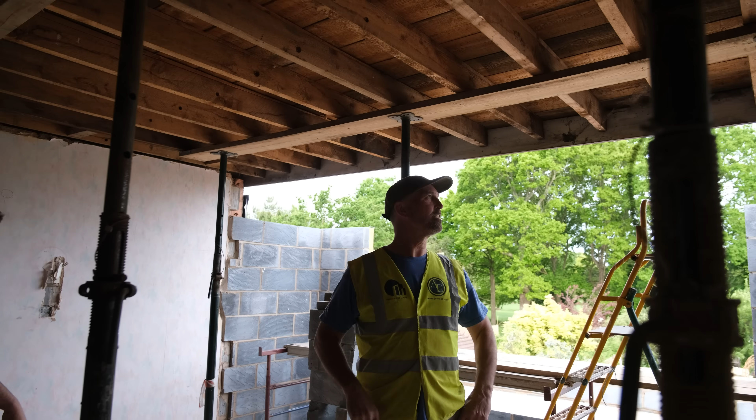So what we're going to do, Pete, is cut the existing blockwork at this level. The reason we're cutting it here is because the top of the wall plate is going to come flush with this, since that's the datum for the trusses to sit on. So the gauge from here to here means we've got to put a cut in here, a slip.

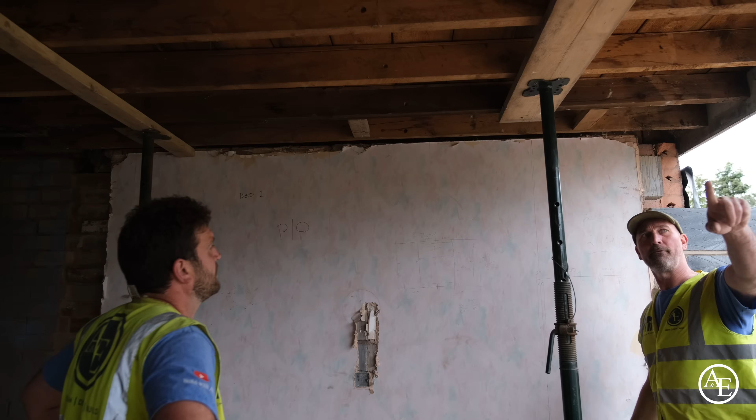I don't want that slip high underneath the wall plate, so we're going to put the slip in at this point, then put a full block in, then put the 4x3 wall plate across there, and the same on the existing side. That means the new wall plate will run from the outer leaf all the way through, and it'll be absolutely solid and constant.

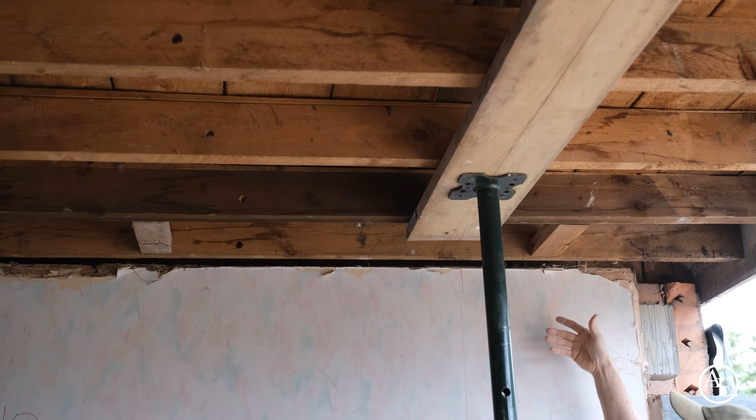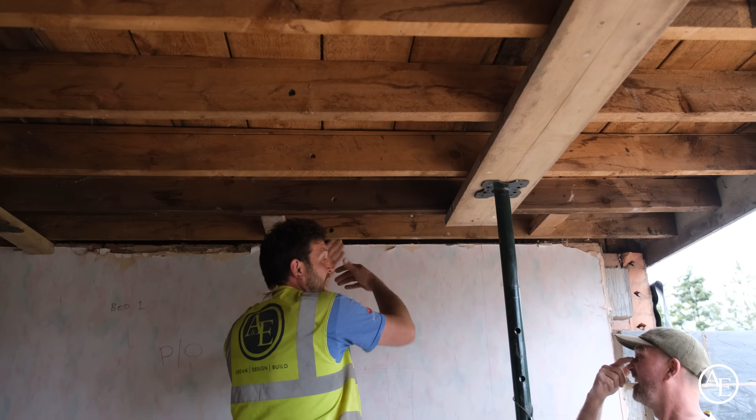The thing is, we're going to cut some of this and leave this joist in. We'll then cut that timber, fold back the felt or whatever we need to do to make it work, and then the lads can run that blockwork. So we're cutting from this side back and peeling the roof back from the top, just to keep it watertight for now until the trusses arrive. Once we get a date for the trusses, we'll have to end up stripping all this out.

So the decision is: do we strip it out now, or wait until the trusses arrive? We've got good weather at the moment, but we don't know what it'll be like going forward, it could rain. So it's a free covering at the moment, and the way I look at it, the best thing to do is wait until the day before the trusses.

It will take us a day to strip this between us, then it's ready to rock and roll. It'll take us half a day to prep all the ends there, get them ready for the girder truss to go in, job done.

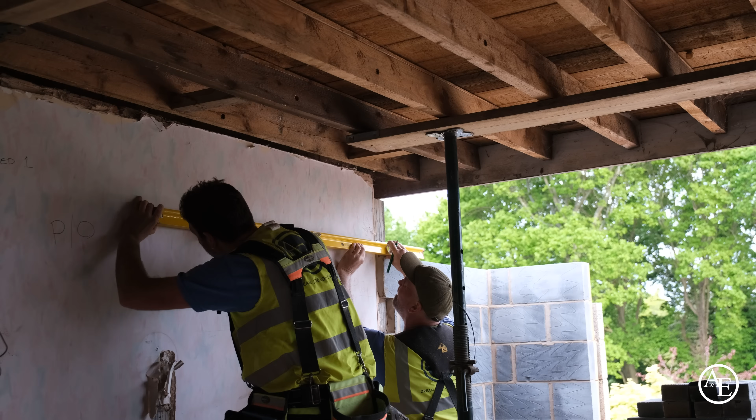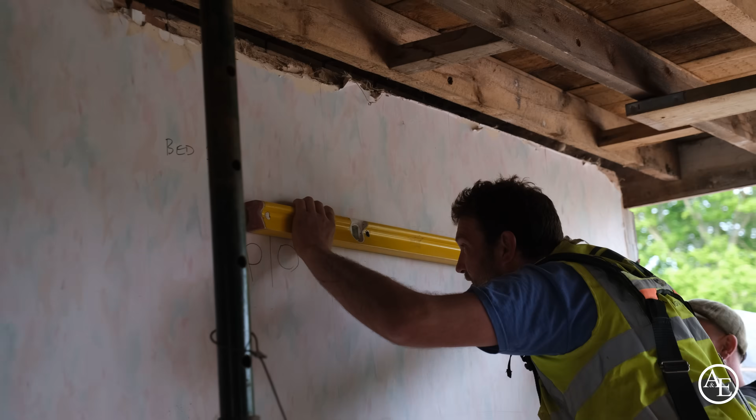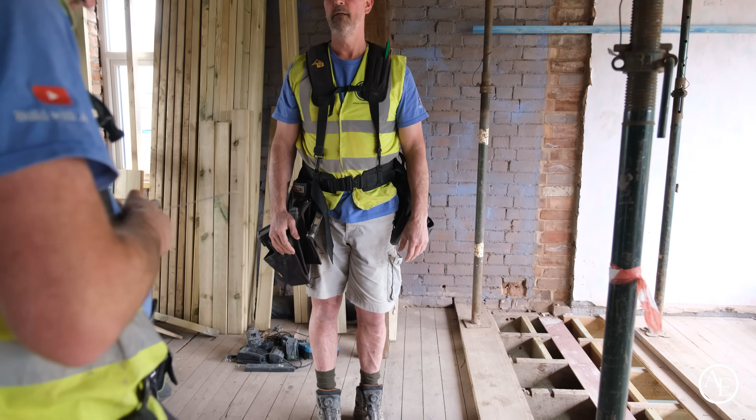That'd make this... Happy with that? Yeah, oh well, yeah. Sorry, can't get it started now. I love the way we've had this role reversal, you know what I mean? Usually it's me and... Didn't realise it did that, Pete. You've only had them 3 years, haven't you? I've had them 3 years, I didn't know it did that. No. Learn something every day, don't we?

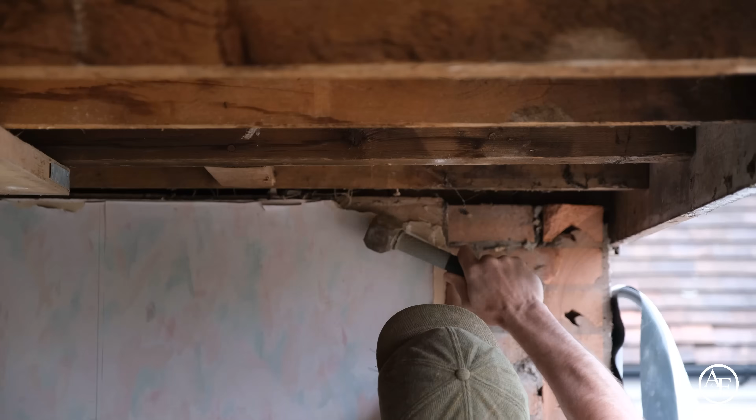That's lovely, that, Pete. You're right, Jim? Yeah, that's beautiful, mate.

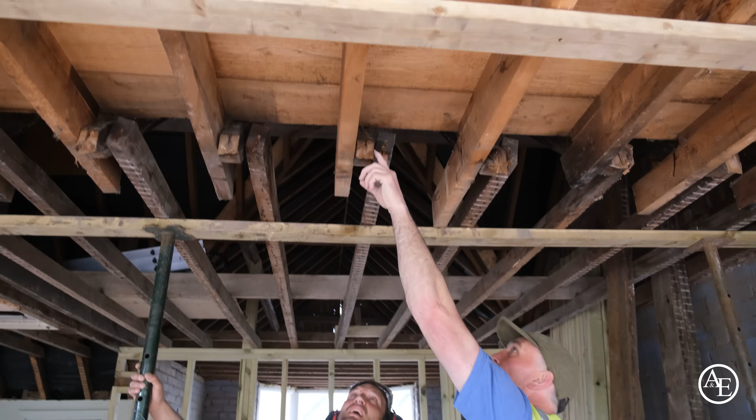The reason we put the back on, guys, it just helps that blade keep it stable instead of drifting. But then we need to use a hanger that's going to hold this, don't we mate? Yeah, because it's going to be 4 inches, isn't it? So the jiffy's got to be 4 inches wide, so we'll cut all that nice and neatly, all on the same line, seat cut and plumb cut to take the two of them.

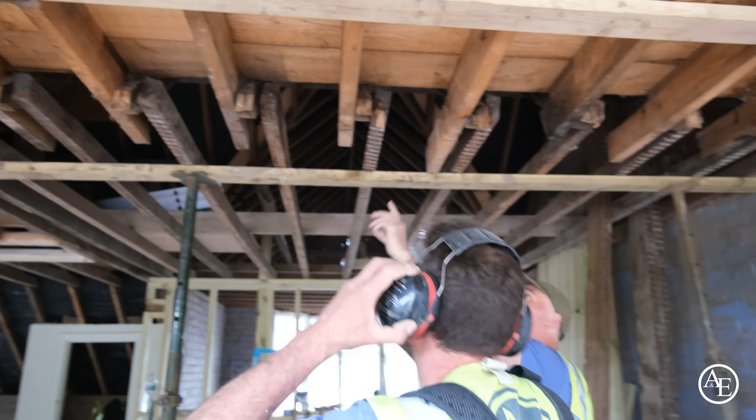We're going to make sure these are spot on here. If they're not, we'll trim them to suit. But then everything else will be aligned, and the trusses will just come up, and it'll be a girder truss that takes the weight of this roof and the weight of this ceiling joist here, mate. It'll be like 3 laminations of the trusses.

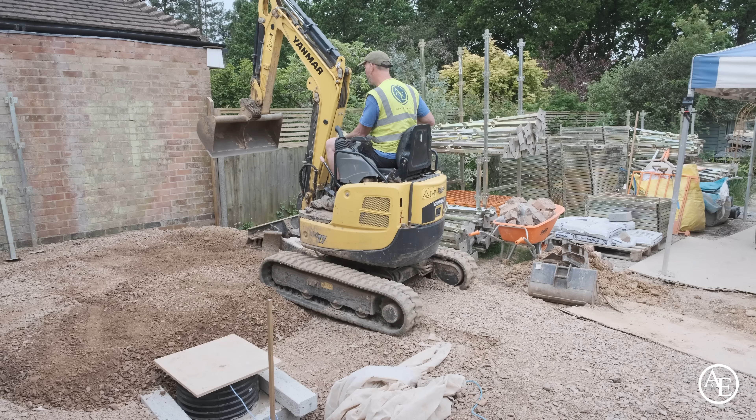Making it nice and safe. The G-decking's up quite high, and the one thing I want to do is give it a lot of support on this movement this way. So what we're going to do is level up the stone just here. It means I can bring some G-decking out, and that'll stop any wave coming this way, just make it a lot more stable. I can then return it onto the side, and then crack on and get on with my job.

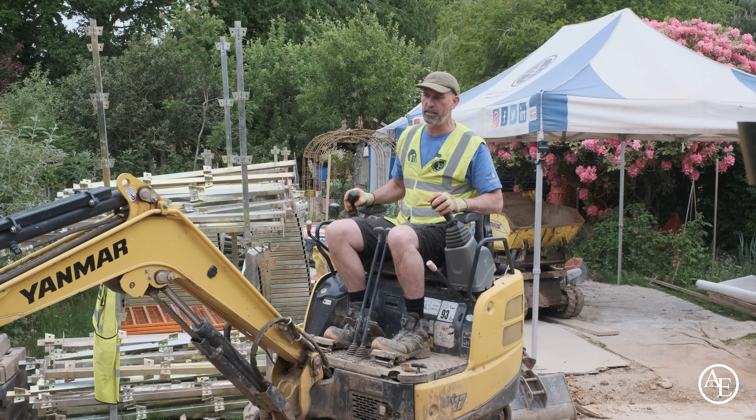Got a lot to do this week. Now the trusses have been ordered, they're going to take about a week and a half for making trusses. If you haven't watched that video of how to make trusses, see the link above, that will take you to how they make them. Absolutely brilliant, really amazed how much they do. How many trusses they produce in a week is phenomenal.

I love my G-decking, yeah I do. I really do like my G-decking. Even James likes the G-decking, except for this one bit of handrail. Yes, that's it buddy.

I'll be able to stand there to there. That's looking good.

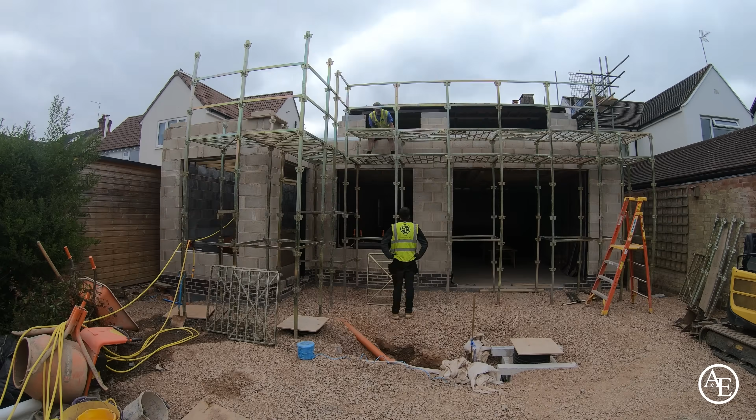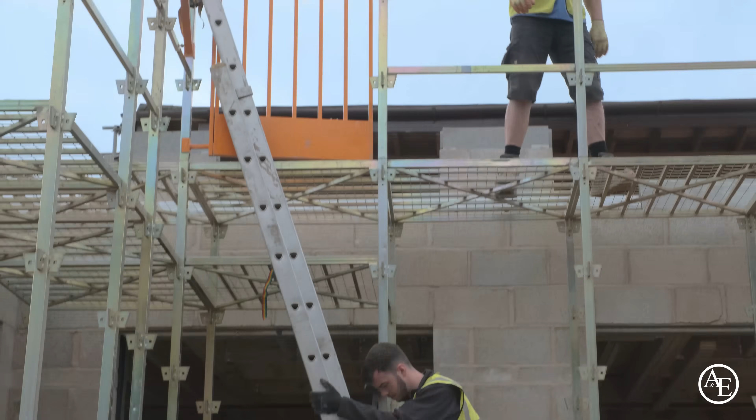Feel a lot safer. It's got some sway in it, but once I return it there, lock it off, get that one in, and then lock that off, I'll be a lot happier. The reason I've moved that out just one more rung is I like to be able to hold a ladder as I'm getting off it like that, instead of coming down here. That's a lot better than this now.

Can I have another upright here? Because what I'm going to try and do is just get this a bit more stable. This is what I don't understand - why didn't G-decking, so my G-decking, I love G-decking, but why didn't they just extend that down to go into a pole here, or extend it so it can latch into here, just to stop that wobbling. So what I'm going to do to stop that is try and latch something into here, strap it on, put another upright.

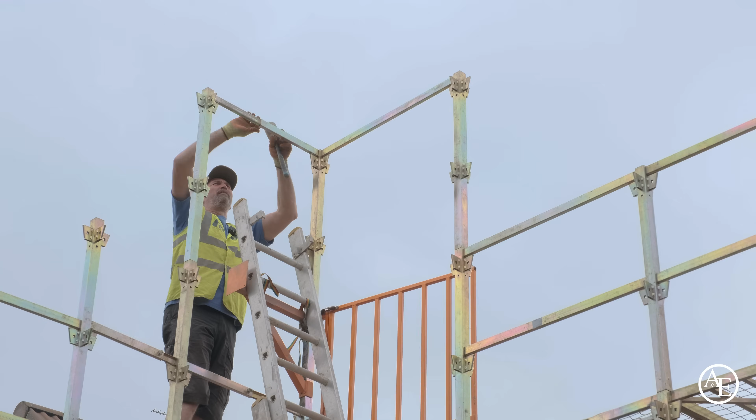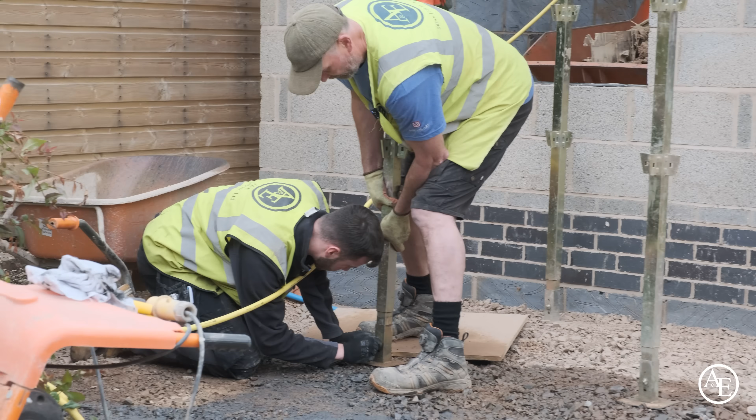What we're doing at the moment is just lifting the G-decking this side because I want it to level up. If anything, I want it to slightly kick into the build, just give it a little bit more stability. That's why we lifted that leg up, get it pushed up a bit more - it'll force it into the building, which is really what I'm after. That's it, get it. That's it. There you go, lovely. Just helps protect the pipe, doesn't it?

There you go, lovely, mate. Thank you, buddy. And then can I have a 750, please, mate? 750.

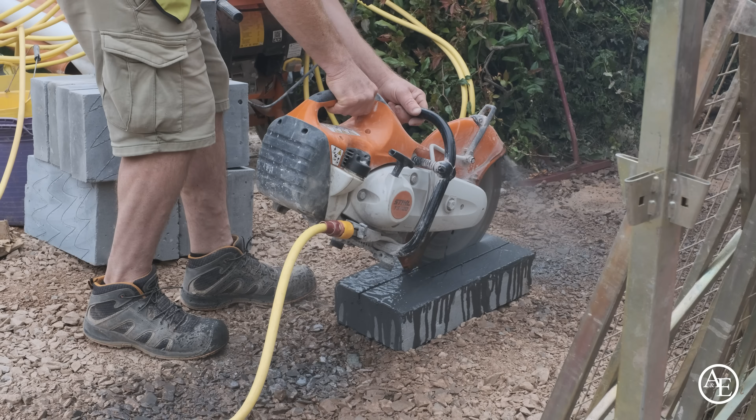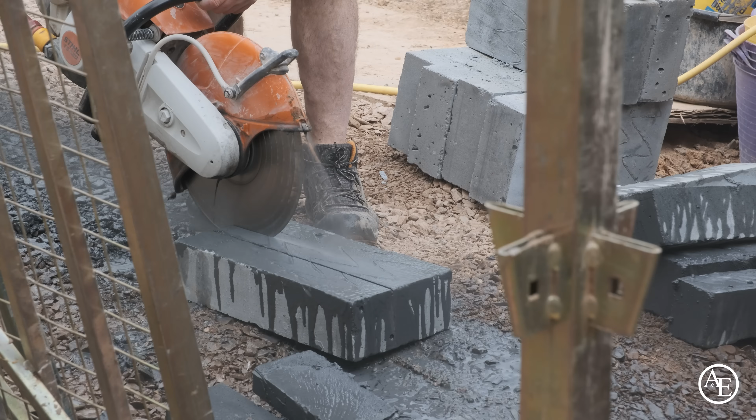Wet cutting with these blocks, if you leave it on your legs, if you've got shorts on, it burns your legs.

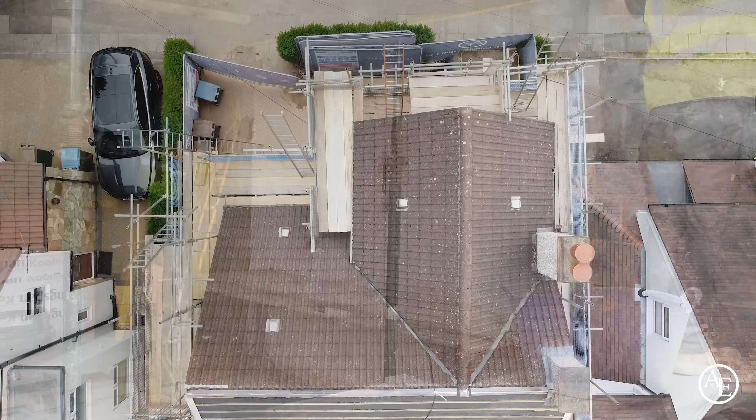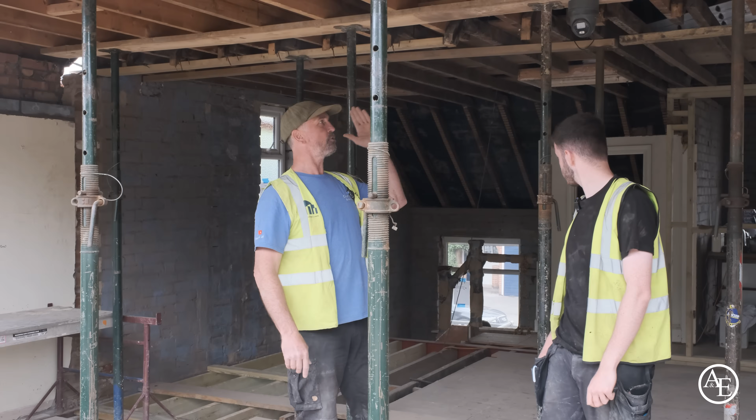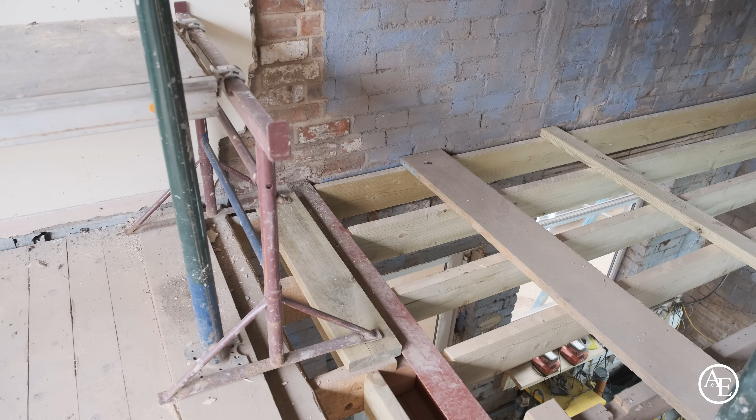So what I've got James doing is cutting the wall plate for there - that's going to be A wall plate, B wall plate, not too short. One thing we've noticed, because of the way the truss is going to line up here, we need to do a little bit of breaking out just down here. These joists aren't fixed at the moment, they've got a lot of movement. So what we'll do is put a couple of screws through this plank here, then put some timbers down here, just so we've got something to walk on.

Hold on, is this a Milwaukee tape? Oh my God, look at this. So James, he's gone to the red side. Pete's on the yellow side, James is on the red side, I'm on the kind of greeny-grey sort of colour, Festool. So this is Milwaukee. Now I've got to say, they've massively changed their game in the last 2 years. They've put so much investment into coming into the UK, and some of their kit is really, really good, I've got to say.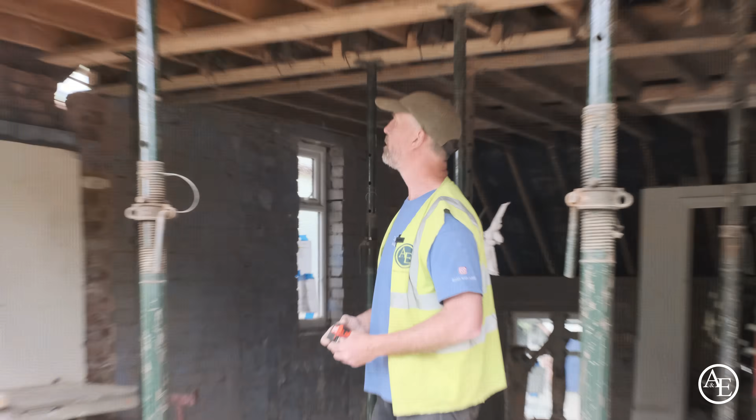Definitely. How do you find all your Milwaukee stuff, mate? Tools wise good, the tapes bend a little bit there. Do they? I find the ends bend, yeah. A bit too flexy? Yeah, feels a bit too flexy. But apart from that, all good. Apart from that, all good.

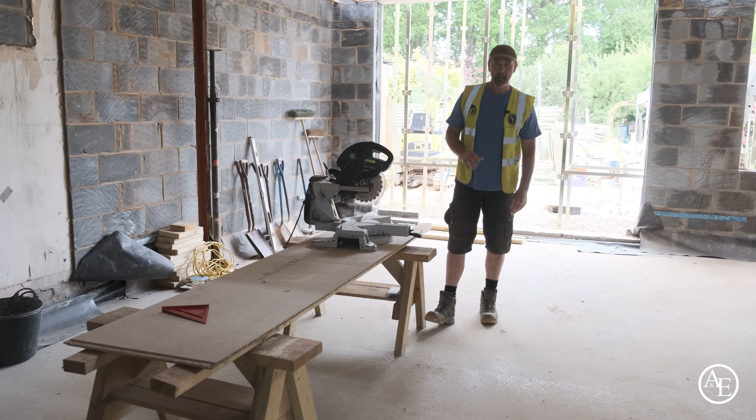As we explained earlier, James is in his last year of apprenticeship, and with the Festool, he's never used one, so I'm going to give him a bit of a quick run through on the Festool.

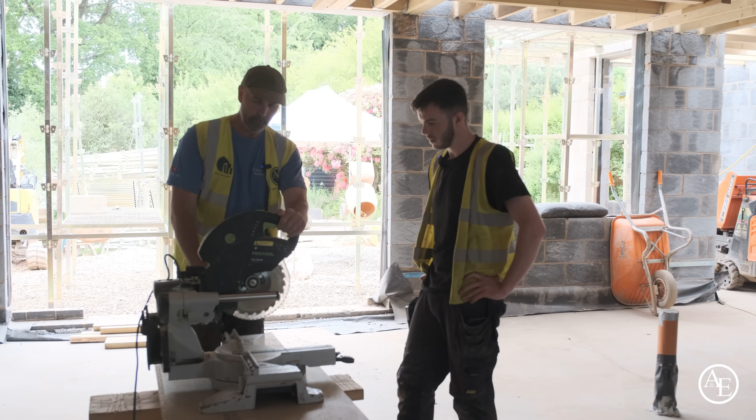Basically here, James, that's the lock off here, which stops the bed from sliding, so always undo that there. And then that allows them to move. And then the other one is, it's got a lock off here underneath - you see it there, that pin? So basically, when you put the Festool away every night, you'll always end up locking it right into that position, mate, and just locking it off. So when you unpack it, I then just take this out of there, and then undo that, and that's it, she's ready to go, mate.

And obviously, whenever you're cutting timber, always draw that way in like that, okay? Never draw that way. Always that way in, okay?

The other thing is that what we're now doing is putting wall plates on. So wall plates, in my day, 99% of the time was always 4x3. So this here, buddy, this is beautiful 4x3. Now, I picked out some really nice straight lengths.

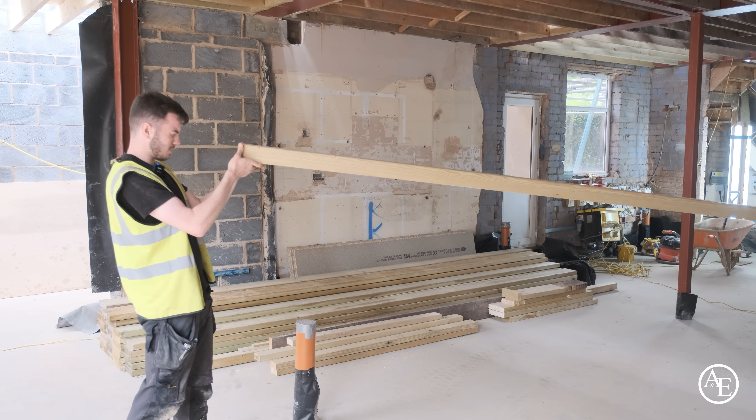So what I always do is I look down, James, and you can see it's got a little bit of a bow in it. So what I'll do, because the bow's that end, I'd end up cutting out the waste that end to try and get as much of the bow out as I could. So I'll let you cast your eye down there - you can see that bit of a bow. So what I'll do, because this is quite straight here, I'll then cut that to suit.

There's also a little dolly that goes here that you can adjust up and down, which is in the back shed there, which we'll get in a minute for ourselves. So if you throw that on.

The other thing is, what you'll find, James, is that truss companies now, they don't send out 4x3 unless you specify it. They'll always send out 4x2. Don't know why that is, they just do, probably because of all the clips they use. But I always, when I'm building, try and always use a 4x3 wall plate, because it's always better. Because then the brick, you can then bed that on, you can then put the straps on, get it anchored in. I suppose 4x2 really could do it, it's just that I've always been taught this way from day dot. But you'll notice a lot of truss companies, when they do send it out, it's going to be 4x2.

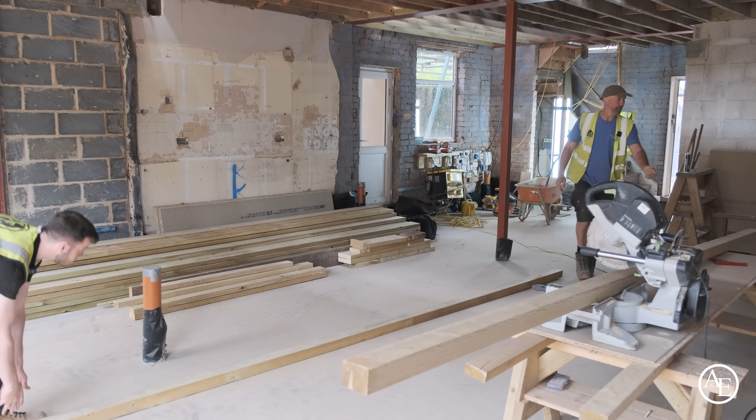There we go, there you go, same again there. If you have a look down that, James, you can see it's got a little bit of a camber to it, hasn't it? So what you'll do, you'll measure this end, because that's where the camber is up there. Chop that out, mate, okay? I think these are about 4.8s, something like that, but it will help if you get the dolly, the little adjustable, because then it'll level it all up for your bed instead of trying to hold it.

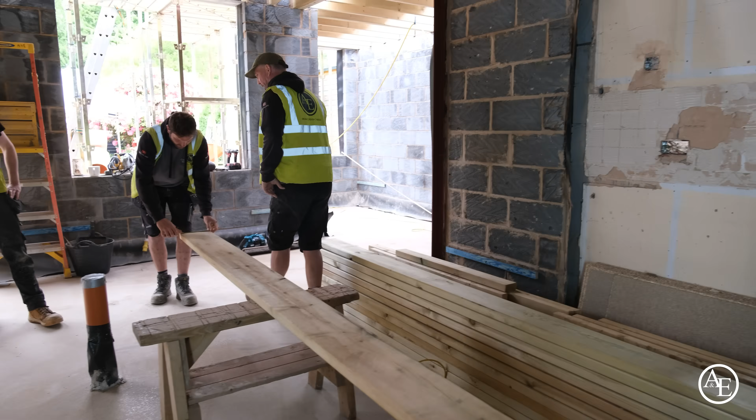So basically, 8.5 at the moment, so we can process 4 bits out of this, can't we? Well, to be fair, because you've got the fall and then the camber, they're all going to be different, aren't they? Yeah, but in essence we can get 4 pieces out. So because it's an 8, even though it's not a true, old school 9-inch, it's actually classed as 9-inch because it's classed as 215. It normally should be about 220, shouldn't it, mate? Yeah, but it's shy, isn't it? But that's old money though, isn't it? Yeah, so basically, we have found out we can process 4 bits of timber out of this 1 piece of timber in the firring strips that we want.

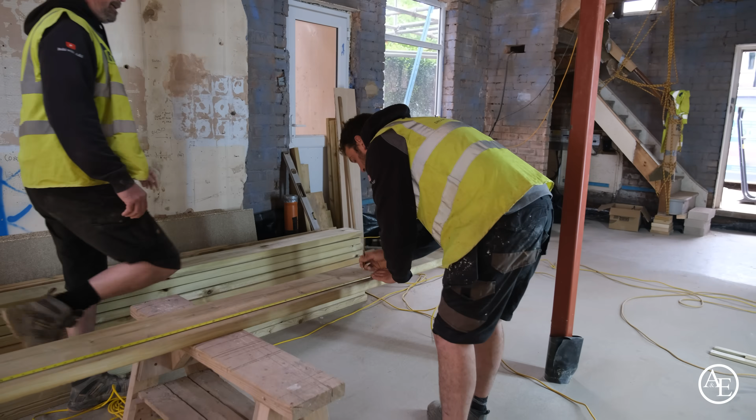So if we then go to the measure that we're having 1 in 40, so basically the length that you got first - the length determines everything, doesn't it? So what have you got all told, Pete, there? That's a nice new tape you got there, Pete. Yeah, you bought it. If you go 160, that's 4 1-in-40s, isn't it? So yeah, it is, yeah.

So James, come and have a look at this, mate. So 4 inches, look. And all we'll do is we'll ping the line, and wherever it ends up, we can sort of see where we are with it, can't we?

This is like watching an old man. There you go.

So James, what Pete's done is a really quick, clever way. We're looking to get a fall of 1 in 40. So 40, 80, 120, 160 - Pete's measured from this end, 160 inches. That means every 40 inches coming this way, we're stepping up an inch. 4 times 1 inch is 4 inches. That's why it's measured up from that point to the 160 inch mark, up 4 inches. That's the guideline where we've got the chalk line now.

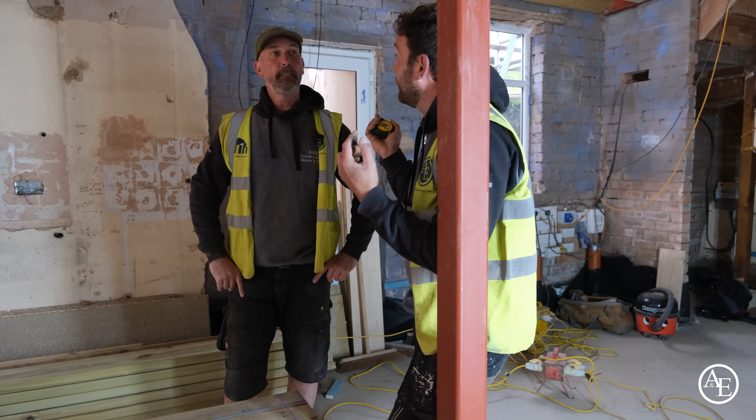If we cast it through to here, you can see it's past halfway. So don't forget you've got the thickness of the blade and everything else, so if anything we probably need to tweak it a little less. Should we try 1 in 45? And if that don't work, we'll try 1 in 50. Do you see what we're doing? Do you understand the process? Now what you're gonna do is we're gonna ask you to set this out.

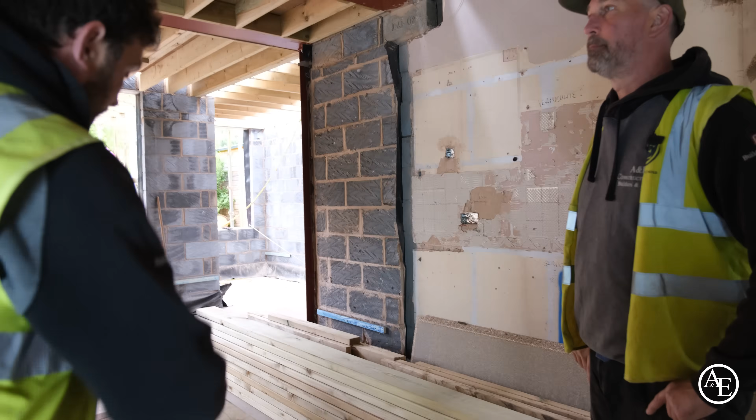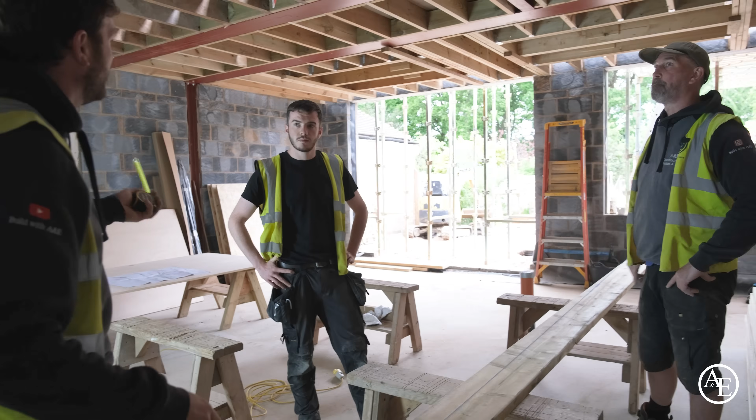So now we're gonna go to 1 in 45. If you multiply what Pete just did, it's 4 times 45 - 45, 90, 135, and 180. So you're going to measure 180 and come up 4 inches. We're going to cast a line and see if we get to the halfway point. This is just basic, we're not going to ping the line yet, because this is about working out the most efficient way to machine the timber - a combination between the best fall and being cost effective, because the price of timber's gone through the roof, so it's one thing you've got to consider.

So if you do that, then you've got your own tape, well done. So let's get the string line out of the way. If you just wrap it up, that's it. Now if you measure - basically 4 times 45, what's that buddy? 180. So move to 180 then.

Now you can see the difference in distance there, can't you, straight away, from the 1 in 40 to the 1 in 45. So basically, now you measure from that edge how many inches? 4. That's it mate, lovely. Beautiful, so now that's going to be our strike line as we put that string through there again. Okay, let's do that again, see what we get up with.

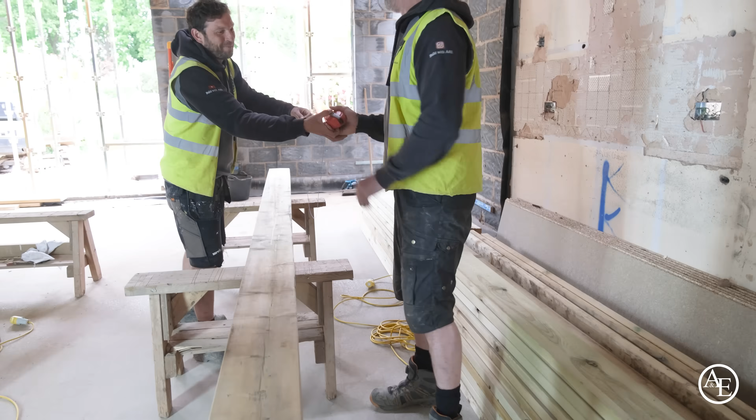Oh I'm liking that. Yeah, but you've got to do it. No, just put your thumb on it. Keep your thumb out there. No, pull it out. There you go. See, look, sophisticated. So now run on that line there, you see. What I'm going to do is bring it, grab that. That's it, pull it over.

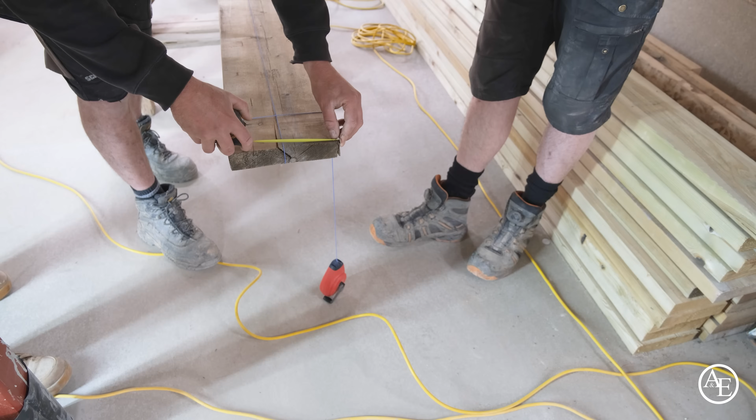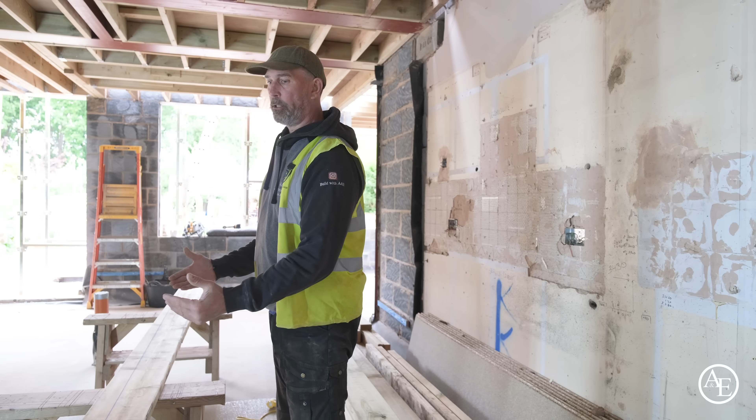There you go. Now you can see with the processing, we've got plenty to play with, haven't we? We've got 4 1/4. So by the time we process it, we'll actually get 4 out of this, won't we? Because you're going to go from nothing, then straight line all the way down - that's 2, isn't it? So basically we'll get 4 timbers out of 1 timber. That's why it's always good to check what you're doing. I'm happy with the 1 in 45 fall. The water's going to fly down there anyway, but it means we're not wasting a timber. As Pete says, timber's expensive now.

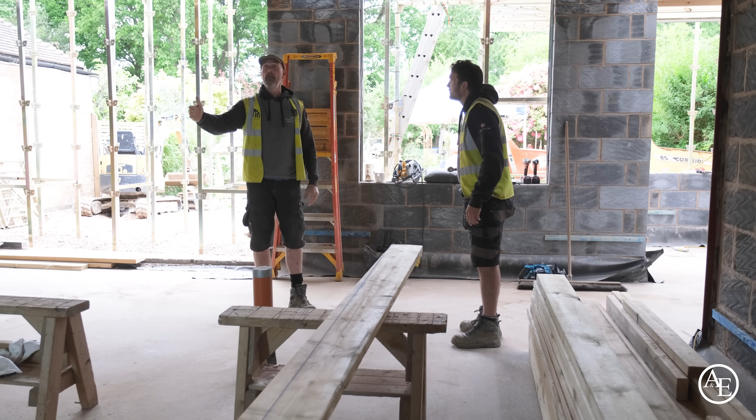So what we'll do now is start processing that in the full length like that. You'll do your marker like you've done, ping it, job done. So we'll have one fence set so it just comes to this measurement here. So one person will cut this line here now. The next person will cut the nice straight line with the big saw all the way through, screw down the timber so it can't move as you're processing it. This person then will carry on cutting this angle. Once that person's processed that one, you'll kick it back to this guy here. He'll then ping that last one.

That'll be it, okay? Alright, everything starts with this roof, mate.

The reason it all starts with this roof is because the water coming off this roof is falling onto this roof here. Because they're going to be some pretty good bits of timber.

What we've got to do is where we've gone to nothing here, Pete, because we're trying to create a camber of the wall, this roof falling this way. As we put that first furring strip in, we're going to have to cut in a certain amount of timber off the end. So we're going to go up to that point one inch, and then the first one is going to be the nothing point there.

Yeah, exactly that, mate. And then whatever the infill is, we can just machine that freehand. Okay, and also we're going to create a camber going down this way, and then to that corner there.

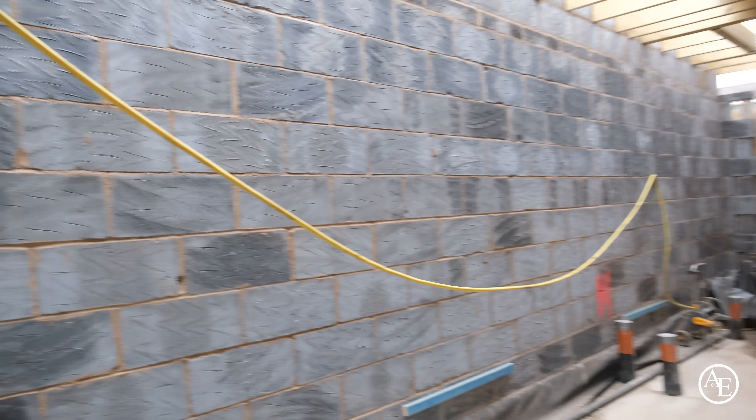As long as whatever the furrings are here, if we just do exactly the same coming that way, we know the water's just going to track along the edge. Obviously it's going to get shorter as we go to the connection point, but that don't matter because we can just machine them up freehand. It just means the water's going to fall to that corner there. That'll work nicely because it's quite nice when you can do that point and a bit of timber in it.

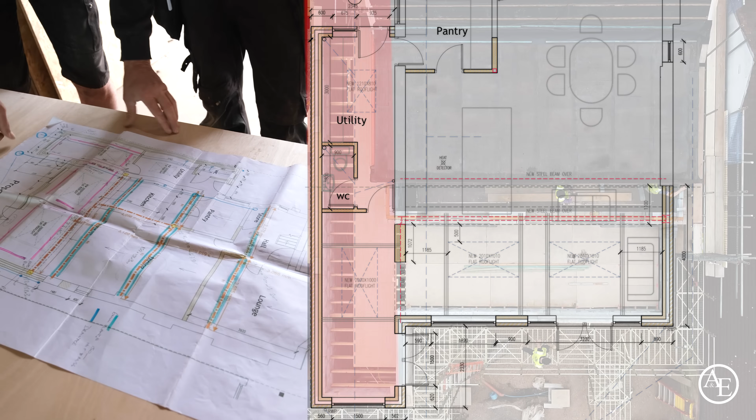So the first thing, James, is because we've got a flat roof coming in here and a flat roof on this section, the first thing you've got to do is determine where your outlets are going to go. So we've got an outlet coming in here, an outlet here, and an outlet here. I've got to make sure the water then trails that way.

It distributes, that's it. And then if you can imagine, because this fall from there to there is bleeding onto this roof, isn't it? Yeah, exactly that. So it's really key to understand the falls I need here, I need to get these furring strips in first here, don't I?

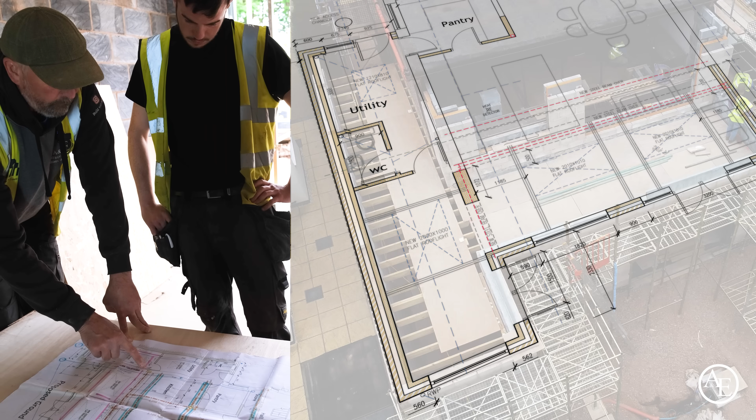Because once that furring strip's in there, that sets the precedence for every furring strip that we put in here, to allow us to get the fall for the water to come onto this flat roof. And it's the same with that, but also you've got to remember that we want the water to end up in here. We don't want all of these furring strips running through all the same. What will happen is the furring strips will be higher here and then get smaller in decreasing, but the actual flow of the water will go down that way.

And it's the same with this. All the water, all these furring strips will get smaller and smaller as the increments come down. That means the water then will come to this corner here. You understand? You wouldn't do all these furring strips all the same way.

Only time you do that is if you have a trough in here, and I don't like doing troughs, they become weak points. So that's why I always balance my furring strips to make sure they decrease in size, but then end up in this corner, so all the water just comes in here. Does that make sense now?

But that's why it's really key to find out your outlets first, then work out how your water's going to come off that roof. And that's why it's important that we have to start with this roof here.

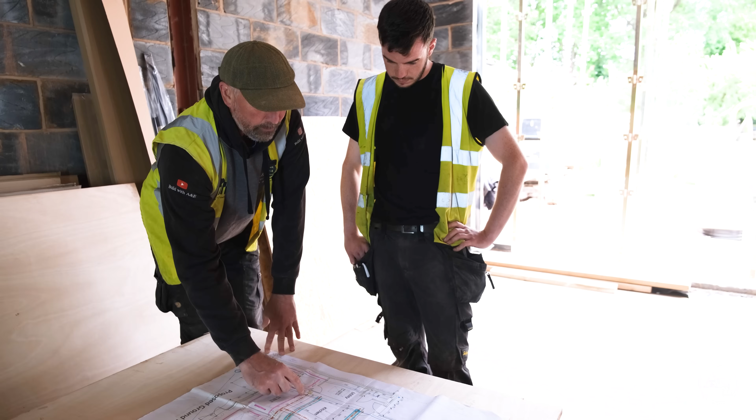That's why I was quite happy to load out these blocks, because we've got to do all the work here first, do the work there. By that time Alex will be out of the way, we can then strip the G-decking down, and then we can carry on.

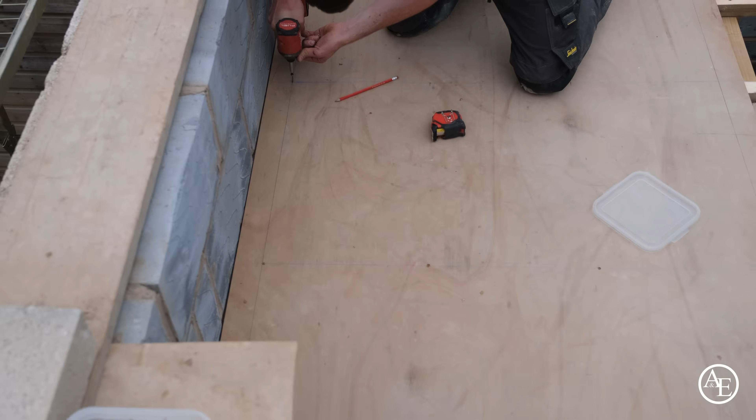Oh yeah, I like it, that's it. So yeah, we'll get this all chalk line pinged up. But the fall's fantastic though. Lovely, yeah, it's really, really, really good. You're not going to get no sitting water. Lovely, that's beautiful. Pete does it again with James.